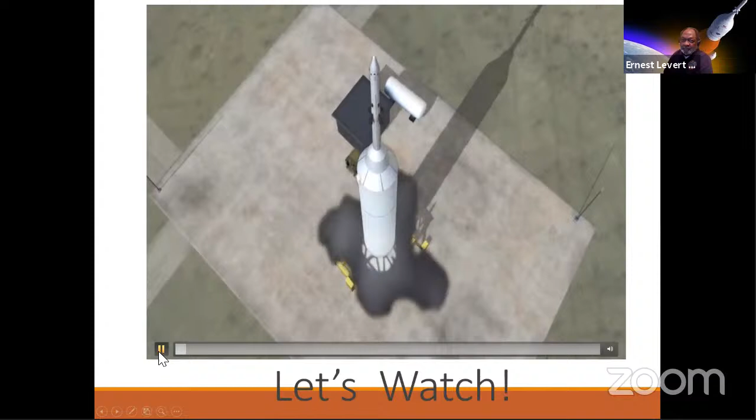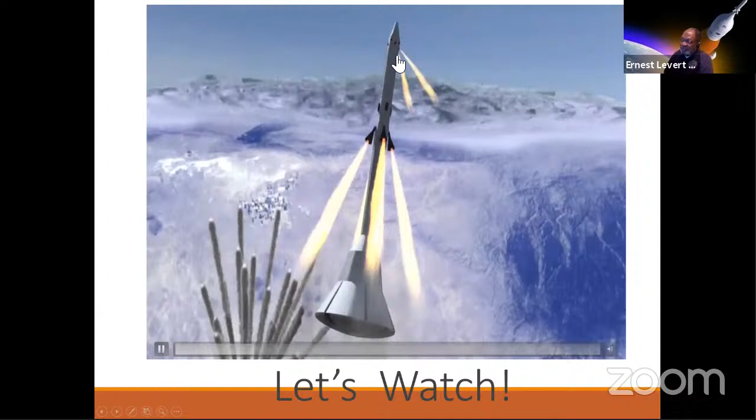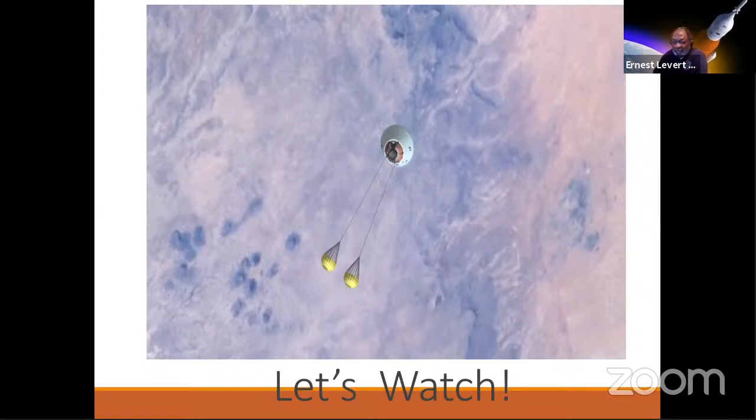So the part that I work on has already been used and ejected, but now you look at the astronauts coming back down to the Earth. This is what you want them to understand and see. So we'll watch this for a minute.

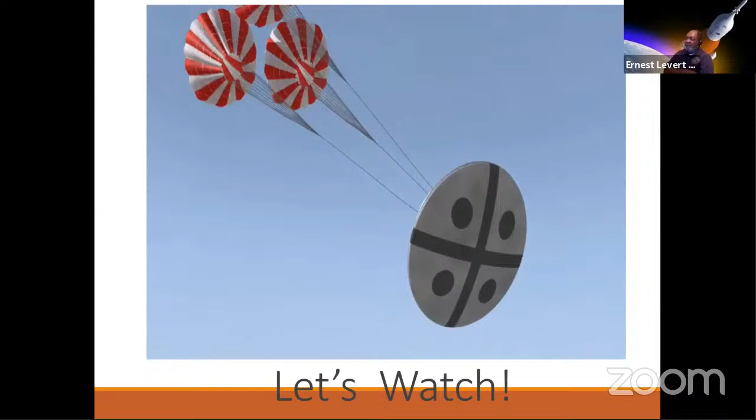The thing about you as engineers and material science, it can be the heat shield, it could be the launch abort system. We have so many scientists around the world working on the International Space Station and of course the Orion project.

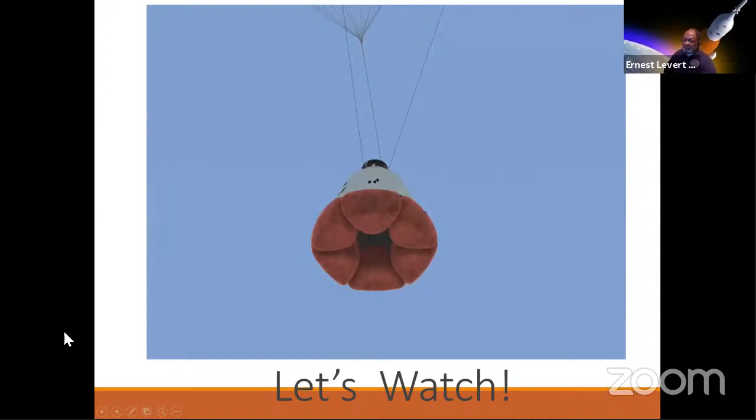And once again, how you're going to land on land is you have to have a landing system. And as we get ready to have a successful land back on Earth, everyone is successful and safe.

So with that being said, you have the launch abort system itself, which is what we're going to talk about this afternoon. And then we have the crew module, the service module. Once again, once this is used, you hope you never use it, but we're going to talk a bit more about how we make it happen.

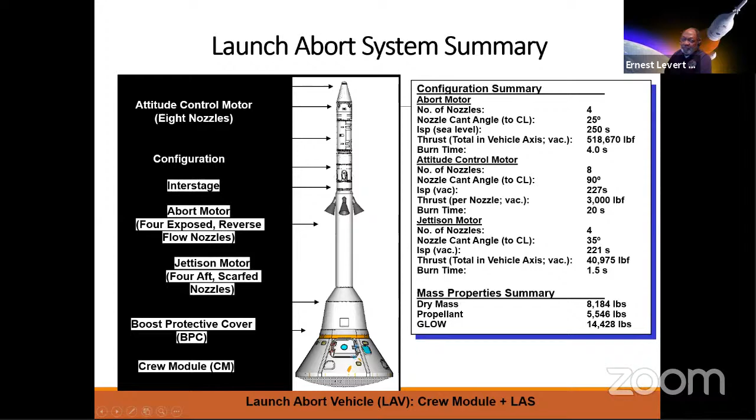These nozzles are a major concern. This is what provides the thrust from the rocket motor that takes place. Once again, these dimensions are in inches, sorry about that to my international colleagues, but this is about 555 inches in length and about 3 feet in diameter. So this is a very, very large system here.

So let's peel back the onion here and look at the launch tube itself, the motor. So you have a solid rocket motor here, but then you've got these four nozzles right here. So what we want to talk about this morning is these nozzles. These nozzles are made of a certain material.

So once again, we're engineers, so we're talking about the material components of this nozzle right here, the launch abort nozzle. So once again, this is a unique material: 4340 alloy steel, and there's an electron beam weld.

This was welded on afterwards, but there is a weld joint here and one sitting right here. So this is an EB weld, and one right here. The next slide will show a bit more detail.

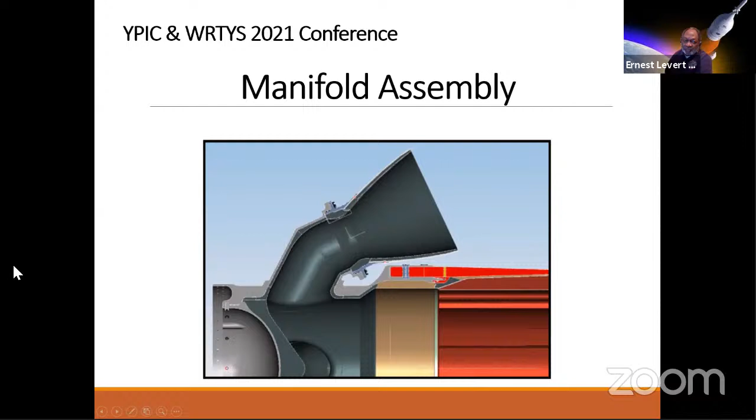And so why was this an issue? The problem we have with this material is, one, you had an EB joint that's 2 inches thick. And more importantly, it's 2 inches thick, 4340 steel. And once again, it was elliptical, so you had major issues with the thickness varying throughout the thickness range.

But EB was selected because of the restricted area. The problem that we had was it ranged from a half inch to a one inch range, to 1.7 inches, to 2 inches on the OD. And another problem, you had a very small clearance of a quarter of an inch to go.

Let me show you back here again, trying to get this beam through this quarter inch material right here. And the problem you had, everyone, was magnetism. This is 4340, it was very high in magnetism, and so you had a major issue with magnetism.

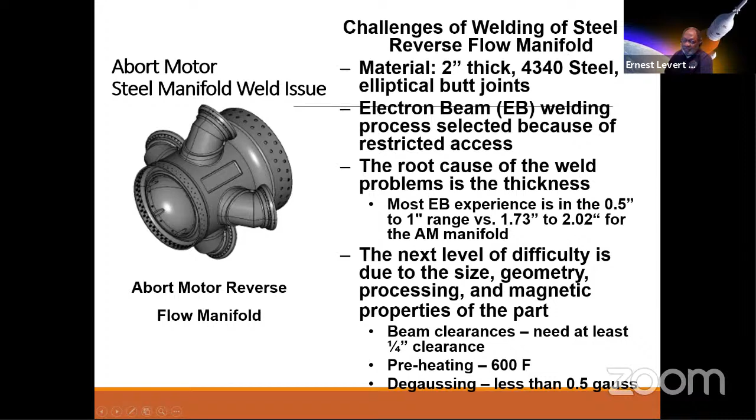And like I said, if you guys were with me in Budapest, I talked about the heat rejection system, but now we're going to focus on electron beam welding of this process.

So electron beam welding is a very small beam of electrons inside a vacuum chamber, welding at 60 miles an hour. But the process is very key to what we're using right now. I enjoy electron beam welding because, once again, of the small heat affected zone, and the most important thing is these electrons can be deflected by magnetism. So with that being said, we had some major problems with the steel.

You see the elliptical on the 45-degree angle. We had one weld here inside, then this other weld had to come in. So we start welding this component.

You can see in this picture the clearance is a quarter inch, trying to get this weld joint in here. Once again, the magnetism is very high in the part. So we ended up taking some material called MU material, putting it in here, and had the beam go in between that material to make the weld joint.

That was really critical and it was causing a lot of problems. Having to do the preheat of the part, the magnetism, the elliptical shape, were major issues. So as a weld engineer, I'm deciding how we want to make this happen, how we're going to fix the problem.

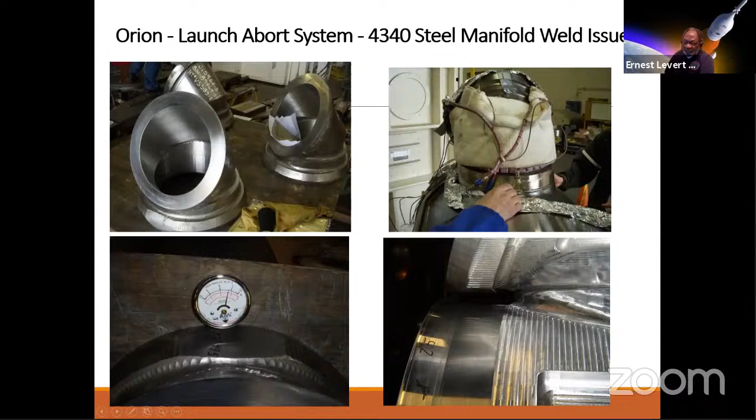So here I am standing inside the EB chamber. This is the nodule before they put the manifolds on. Using the steel, once again we had this MU material, and we were using this to make sure we could control any beam deflection.

So you think about yourself in a production environment, how you can produce this component with all of this contraption here, with the preheat, inside the vacuum chamber. You've got to maintain that — the magnetism was causing problems.

And you look at the weld joint, you had the penetration, but this is not what you want with electron beam welding, okay? So you had issues there — a lot of pores, a lot of outgassing. This was not what I felt was the ideal situation for this process.

We had all these cables here on the floor. We use this to degauss the steel, to get the magnetism out of the part.

When I got called in, I saw all of this information and gathered it up, and the NASA director asked, okay Mr. Levert, you've been here for one hour, what should we do? Well, I shared with him, based on everything I see here, this is probably a material I would not have selected because, once again, it's 4340.

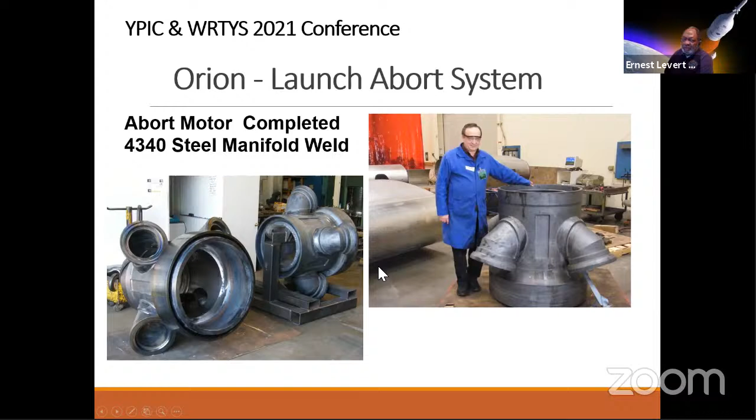But think about this — you're sitting on top of the capsule itself. They asked, what would you recommend? So I went back and did my analysis, looked at the yield we needed, the KSI properties in the weld joint, on the back side of where the thrust is, on the loads on the EB weld.

So I looked at that and decided: gentlemen, based on all of my analysis, I think we should change and go to titanium. And they said, why? When I shared with them all the reasons for using titanium — one, the weight reduction that it would take, going from 4340 to titanium, would be very critical.

It was a 10-to-1 ratio in saving weight, because it costs $500 to put one pound into space. So once again, the cost savings, and it's going to reduce the payload on top of the capsule, and the G-force is going up.

Second, you don't have to worry about any magnetism. So once you clean the parts, clean the parts again, and machine the part ready for EB welding, you wouldn't have any issues with the magnetism anymore.

And the loads were a lot better — mechanical properties were better than the 4340. So it took a year to change that.

So once again, we had a meeting together, found a company out of Indianapolis, with NASA Johnson, NASA Marshall in Huntsville. So the team, ATK, had the entire cost. We all got together in a room, and I recommended we go to titanium.

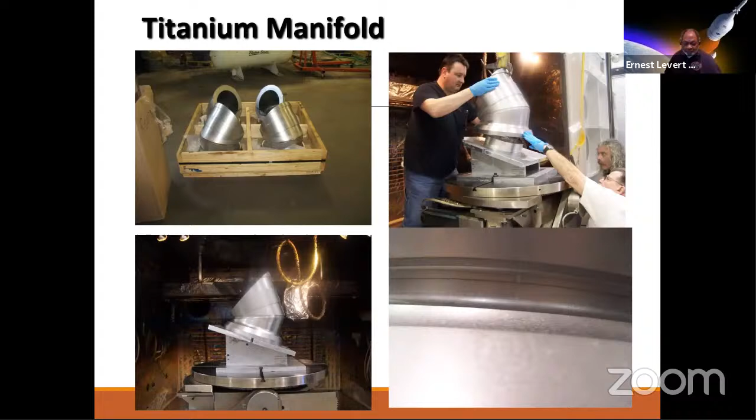And so once again, they asked the question: were we successful? I said yes, we were very successful, because one, we had a great part — it was once again a titanium manifold. The guys did a great job welding it up with the tooling and fixturing, and it just worked out tremendously.

So once again, we were successful welding the titanium. There was no magnetism, no preheat, no post heat, no interpass temperature, and once again the 10-to-1 weight savings. So once again, everyone's very happy with the EB welding of the launch abort system. And I was very happy with that because at the end of the day, I just enjoyed that part. So every day I look at the launch abort system, that is my project up there.

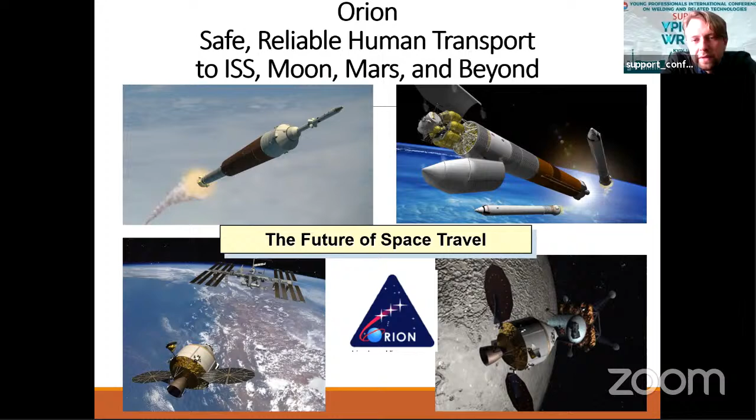My question is also about EB welding of titanium details. It's a great idea, I think. And it's an easy question about defects. You talked about defects after welding in the steels, and in the case of welded titanium details, it will be with pure and clean methods. Are there any defects after welding in the weld or seam?

No, the key was when we cleaned the parts, we manually scraped the parts, and we welded the parts within 4 hours after doing the alkaline clean. Once the parts were clean, we had 4 hours to get them inside the chamber and get them welded, and there were really no defects. We were like 98% pure. We had a little porosity, but all acceptable to a Class A weld for aerospace D17.1.

Our vendor did a great job with the cleaning. I was very impressed, and my EB technician did a great job. We made sure we had a moving gun, and we were very successful with the cleaning process. So there were no defects and no arcing or anything. So it made me very happy, made me a hero for the corporation. Every time I see my backdrop here, this is my launch abort system. So as I retire from Lockheed Martin, I have a legacy that I left behind me.

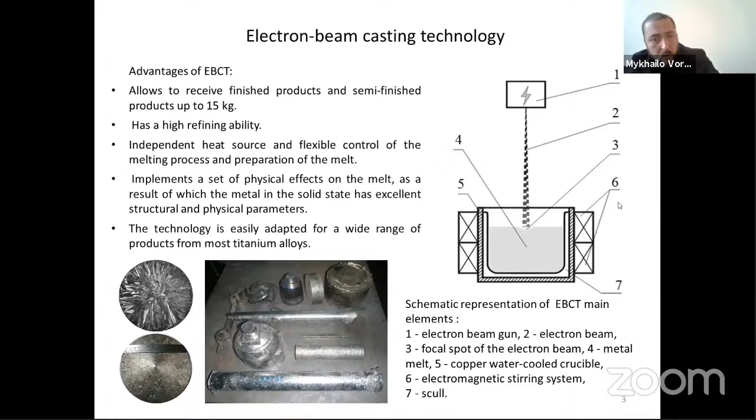As you can see on this slide, the structure of our cast parts is better than in some familiar technologies. The second step was to choose the ceramic materials for producing shells, the molds for investment castings. It was the only reliable method to obtain something very difficult and thin-walled.

Due to technological requirements, Gibbs energy, and price of materials, 3 types of ceramics were chosen. A very important thing is that our method provides the ability of using a cold mold, while other methods require using hot molds, heated to about 600 and more degrees Celsius. Different contact shells were produced to investigate the features of ceramic-melt interaction.

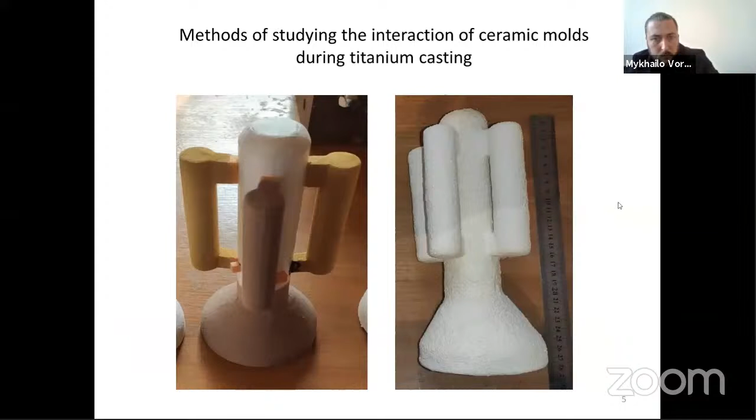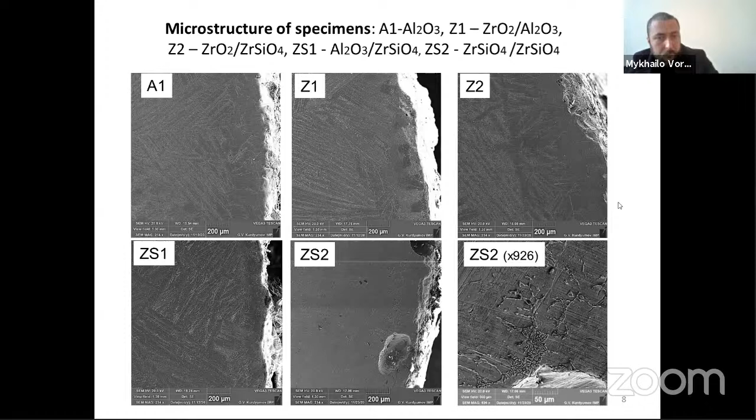Here's the same specimens, but in larger увеличение, I forgot the word, the larger view. Yes, thank you.

The next step was to produce a real implant. First step was to create a model. We chose PLA plastic because of its mechanical properties and ability to be printed as a small detail. Then the PLA part was added to a polystyrene gating system and formed into ceramic mixture. After drying and sintering at 1100 degrees Celsius, the mold was ready to be poured with titanium.

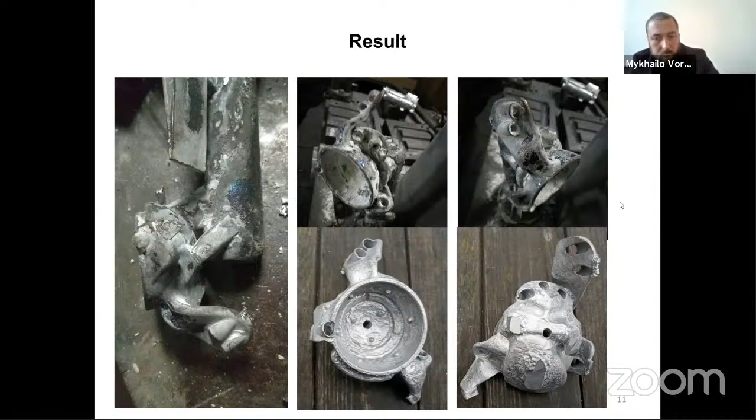If you're interested, we invite you to join us in this work. Thank you.

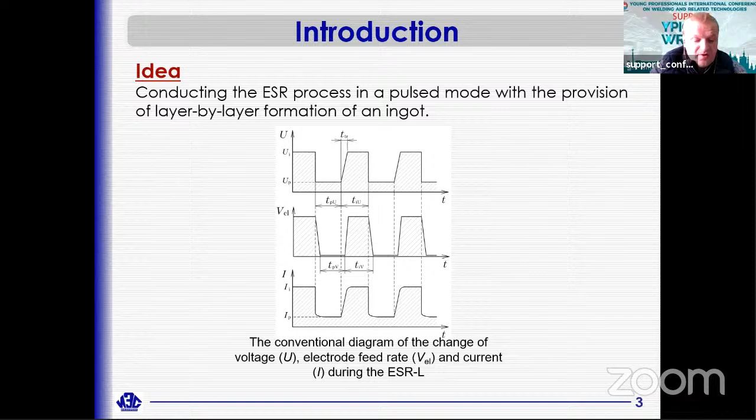One of the possible ways to solve such disadvantages is to conduct the ESR process in a pulsed mode with periodic layer by layer formation of an ingot. The slide shows a diagram of the main parameters of ESR with periodic layer by layer formation of an ingot. The aim of this work was to study the features of the ESR process with layer by layer formation of an ingot and to study the patterns of structure formation of the smelted metal.

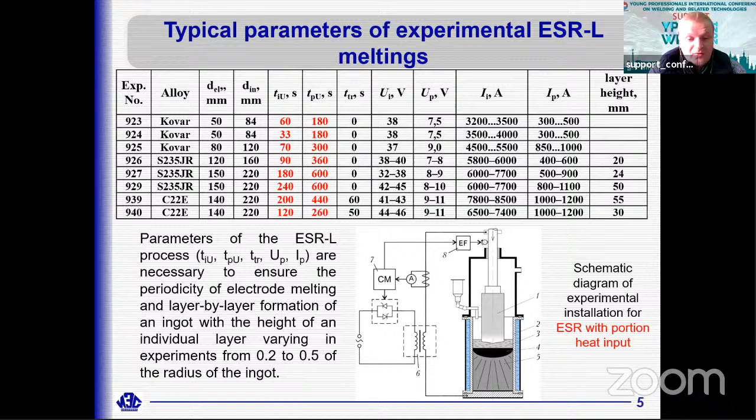This slide shows typical parameters of experimental ESR melting and a schematic diagram of the experimental installation for ESR with portion heat input. Parameters of the ESR process are necessary to ensure the periodicity of electrode melting and layer by layer formation of an ingot, with the height of an individual layer varying in the experiment from 0.2 to 0.5 of the radius of the ingot.

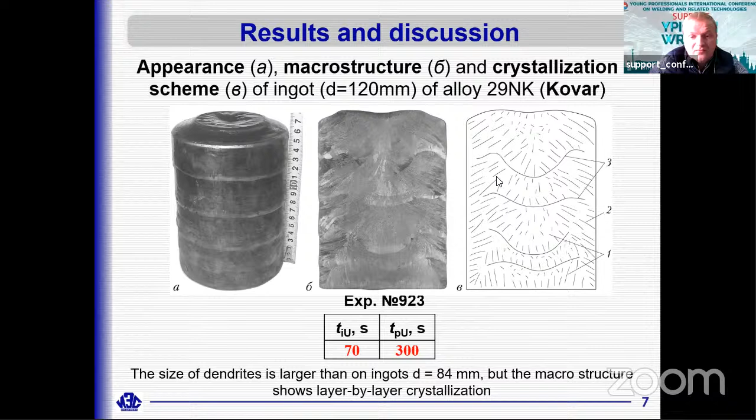We also obtained Kovar ingots of 120 millimeters diameter. The size of dendrites is larger than in the 84 millimeter ingot, but the macrostructure shows layer by layer crystallization. In addition, experiments were performed on ingots of 220 millimeters diameter of this steel. The use of ESR affects crystallization, but we found defects in the macrostructure of ingots.

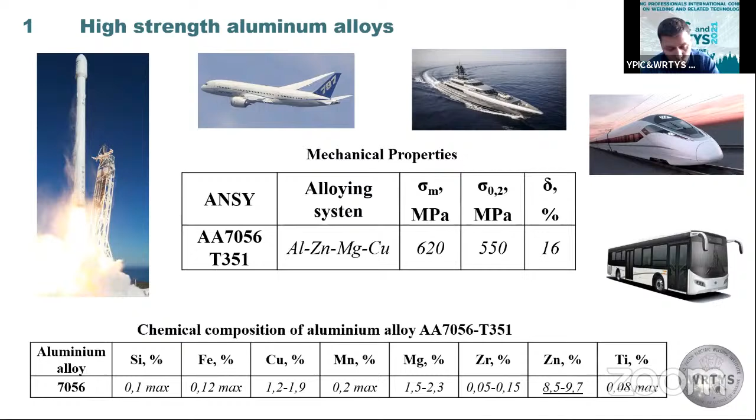In this study, we take a look at the aluminum alloy 7056. The main feature of this alloy is high zinc content, near 10%, which makes it a very hard to weld alloy. We tried to make traditional welding; we tried to weld it in two passes using MIG pulse welding in inert gas with 50% argon and 50% helium. It was welded in our institute. The microstructure was partly good, but there was very high softening in the middle of the area.

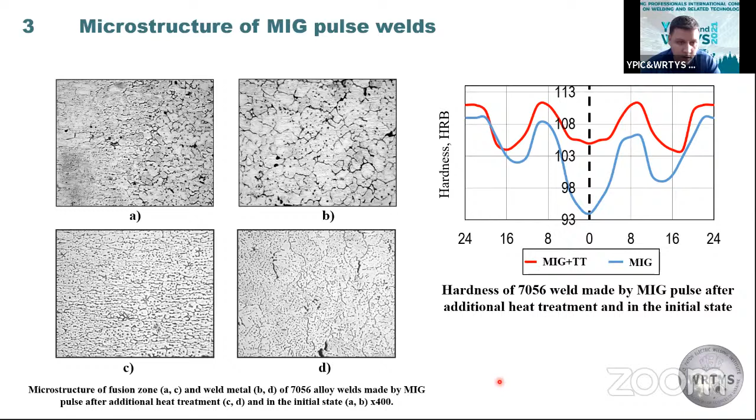Better microstructure, as you can see, this was before as welded joints, and this is after heat treatment. One of the perspective ways to obtain sound joints with less heat treatment is welding in the solid state, such as flash butt welding technology. Using flash butt welding technology gives us good microstructure, but we have some issues with the heat treatment of this alloy. It was T351 treatment, which was not only annealing but also the deformed state. So before welding, it was heat treated, and after that we obtained sound welded joints.

Here we can see a microstructure of as welded and heat treated joints. As welded joints also have some issues in the middle of the joints. We have lower points in the hardness, but after the heat treatment, it gets much better, and we obtain a microstructure more suitable for fatigue behavior.

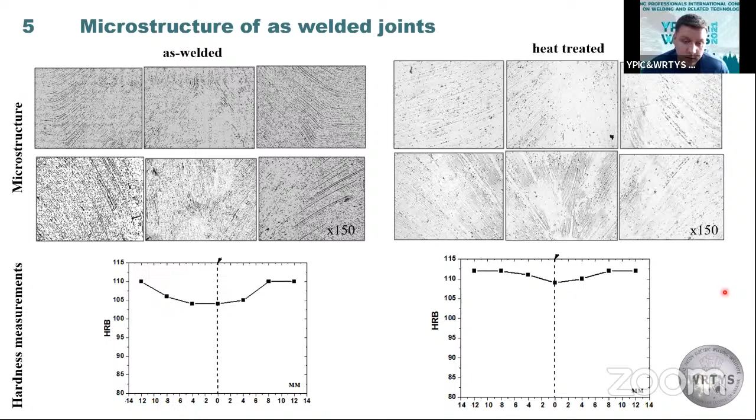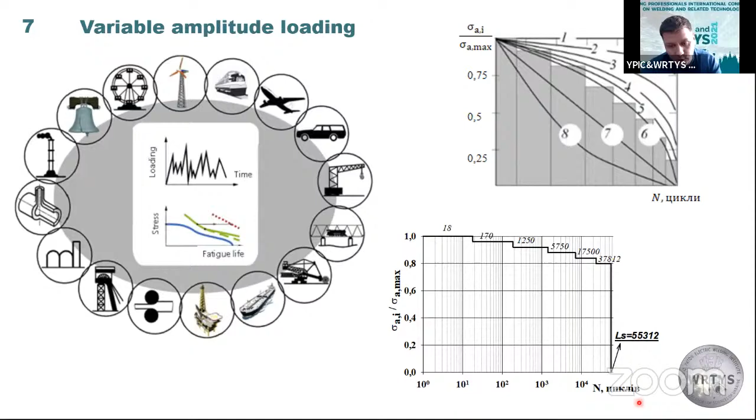Structures have less durability and so shorter life. So we use for the variable amplitude loading a standard Gaussian distribution and provide fatigue testing on this point. You can see here the program amplitude loading that was used to shorten the fatigue experiment time. So here you can see the main data of the provided testing.

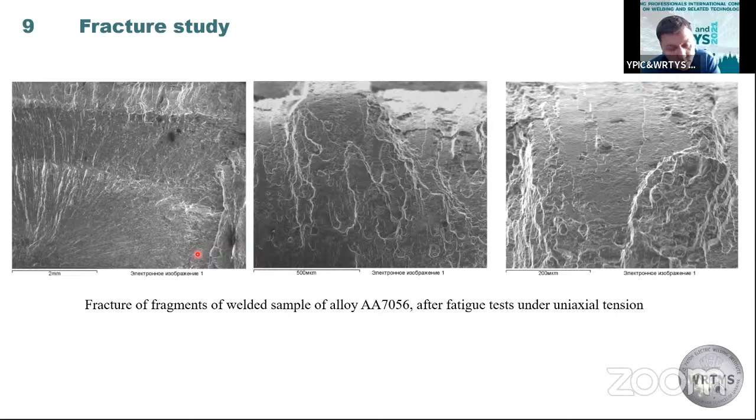Tensile strength of welded joints is near 90% of parent metal, and fatigue behavior under stress ratio 0.1 and variable amplitude loading shows an endurance limit near 60% at 2 million cycles. This confirms the perspective of using flash butt welding for obtaining joints of high strength aluminum alloys with high zinc content.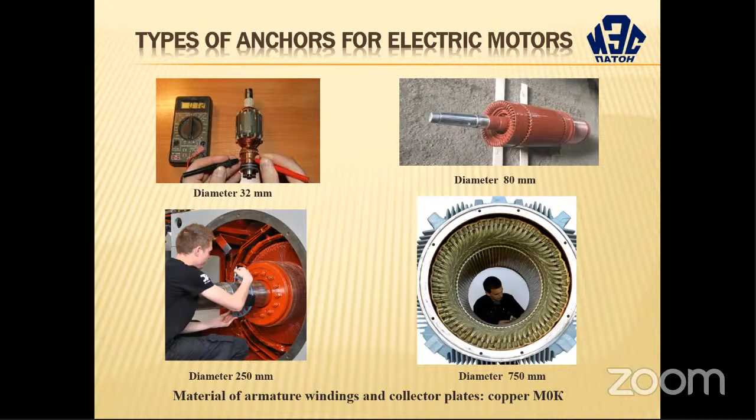An important technical problem is connecting the armature winding with the collector plates, which are made of copper. As for today, the connection of armature winding with collector plates in the manufacture of electric motors uses soldering, butt welding, and argon arc welding.

This uses automatic settings which are designed for large volumes of production. However, due to the wide range of types of electric motors and the nature of the connection of the windings to the collector plates, their use is not always appropriate.

In this work, a complex of works on development of technology of TIG welding in the environment of argon of copper tires with collector plates of a connector, as a starter generator DKS 18-8, is executed.

The conditions of the assembly of the starter generator are defined, which allow obtaining a high quality weld. The connection in the automatic mode, namely, the gap in the welded joint must be less than

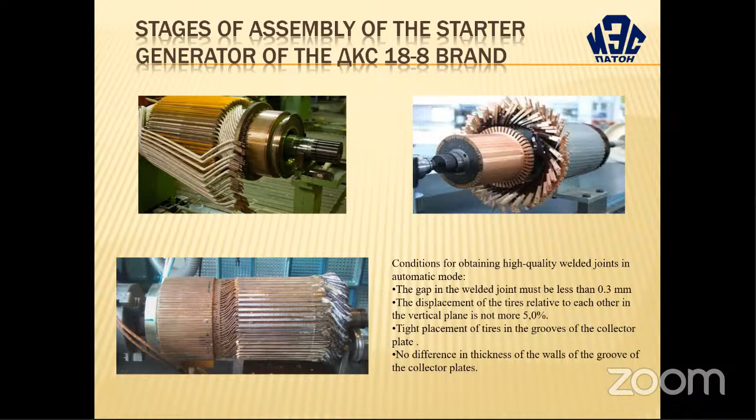Welding in the prototype starter generator was performed using the installation layout shown in the picture. The armature was fixed in a rotator on roller supports in a horizontal position. The burner was mounted locally above the welding area in a device that allowed it to move along the connector lamella in the range of ±5 millimeters.

The picture shows the appearance of the full-scale sample after welding. The connector section before welding and after welding are shown in the picture.

The main condition for high-quality welding of base bars with connector plates is the absence of lamellar jumpers possible when melting metal. In this case, due to the optimal modes, they are absent. Similarly, due to the high thermal conductivity of copper, the short duration of the welding process, and low welding current, there was no burnout of the lamellar plates.

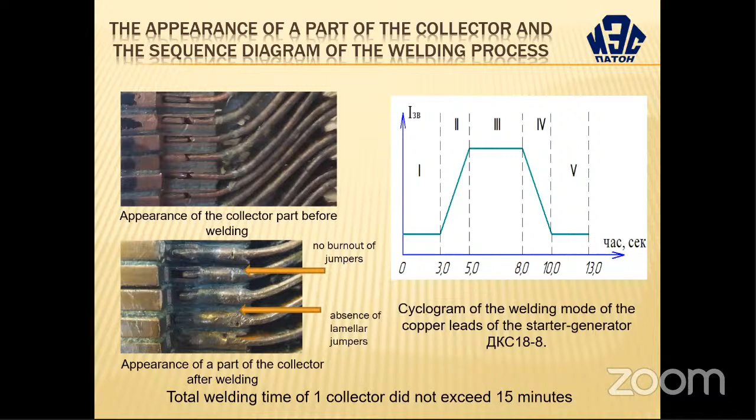Conclusion: in this work, a set of works on TIG welding in the environment of argon of copper tires with connector plates of the collector of the starter generator DKS 18-8 is performed. The conditions for the assembly of the starter generator DKS 18-8 which allow obtaining high quality welded joints in automatic mode are defined. As a result of the conducted experimental works, the cyclogram of the process of welding is constructed. Technology parameters of welding are defined.

The developed technology is quite rational in the manufacture of a small number of starter generators, such as DKS 18-8, as it does not require specialized expensive installation. Thank you for attention.

Thank you for your interesting presentation, Taras. Does everyone have some questions? So there are no questions. Maybe I will ask some.

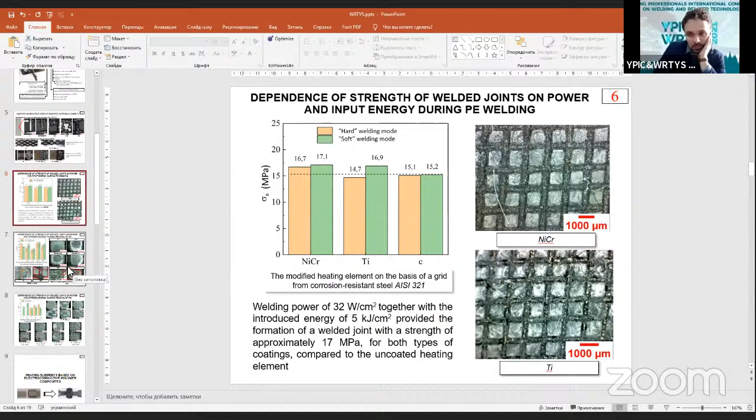Further, we used these heating elements to weld high-tech polyetherimide, which is widely used in the aircraft industry, and the best results were obtained using nichromium coating, with an increase in strength at the level of 10 to 13% in the soft welding mode, characterized by high welding time and low welding power. As you can see from the fracture surface of the welds, in the case of nichromium coating, fracture was conducted by the heating element.

Decrease in strength was caused by such defects as holes and others. Also, we used a metal mesh made of titanium. As you can see from the diagram, it also showed an increase in strength to 15% in comparison with standard, unmodified metal mesh.

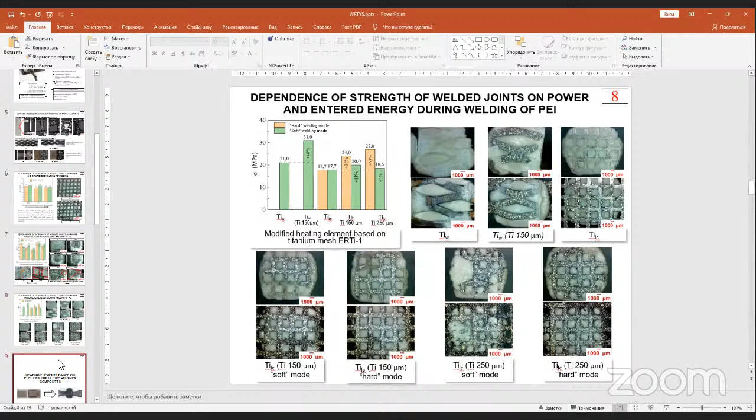But an increase in strength to 13% does not satisfy our demands. So we moved to heating elements based on electroconductive polymer composites made of polyethylene, filled with electroconductive carbon black and carbon fiber.

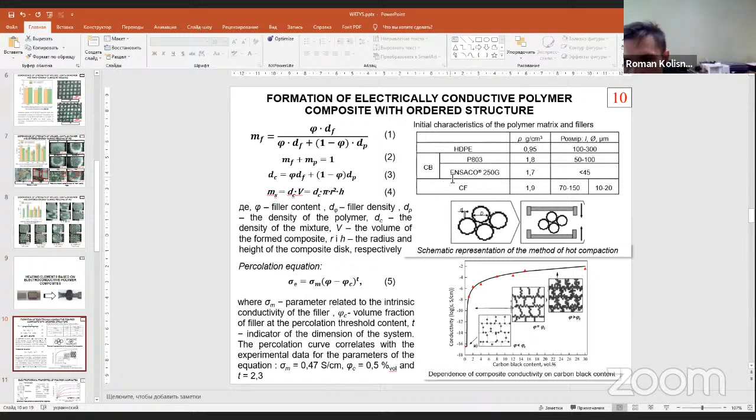In the case of composites filled with carbon fiber, and combined filler of carbon fiber and carbon black, we see a decrease in temperature after applying a certain critical voltage, connected with a positive temperature coefficient caused by thermal expansion of the polymer matrix.

So further, we used composites filled with carbon black, increasing filler content to 12 and 16 volume percent. In this case, the composite generates heat, but it is unevenly distributed along the surface of the heating element, and the weld joins only in the area where temperature was higher than the melting point of polyethylene, which is 130 degrees.

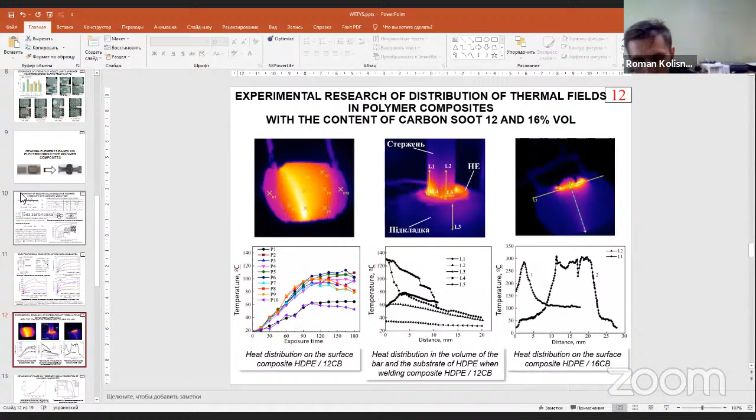So further, we increased the filler content to 30 volume percent, and in this case, after applying a value of 5 volts, the composite heats to a temperature of 200 degrees Celsius, much more than the melting temperature of polyethylene. In this case, the thermal conductivity of the composite also increases, which has a positive effect on our heating elements.

After that, we used these elements to weld lap joints and butt joints, effectively using them. As you can see from the pictures, the temperature generated by this heating element is sufficient to form a weld.

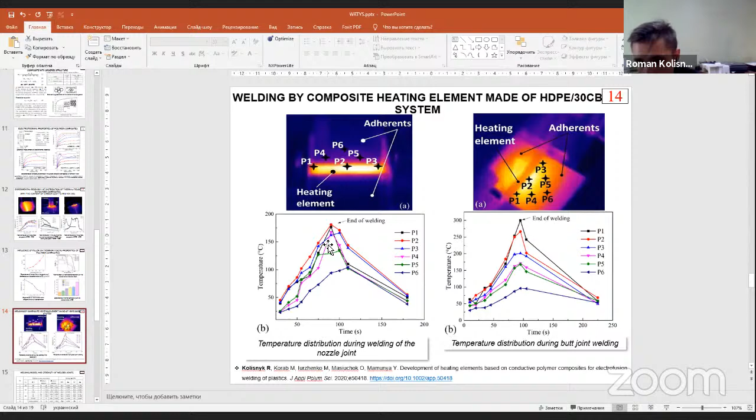The welding modes were the same as for modified heating elements: hard mode, characterized by high voltage and low welding time, and soft mode, with long welding time and stepwise increase in voltage. The best results were obtained using the soft mode.

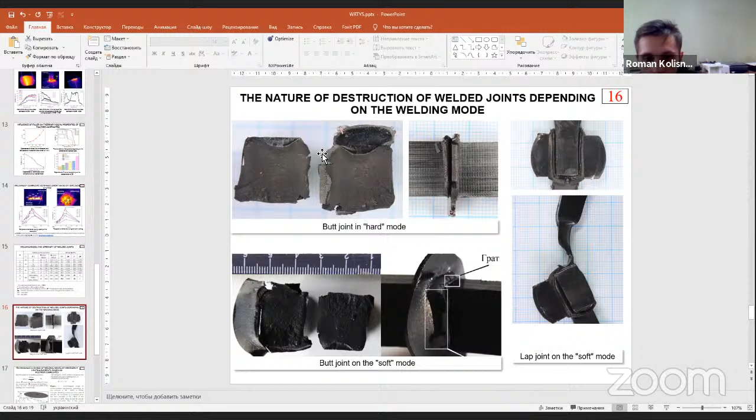Depending on the welding mode, we also observed different fracture results. In the case of hard welding mode, as you can see, melting of the surface in the heat-affected zone is poor, and the fracture is brittle.

In the case of soft mode, as you can see, polyethylene melts better, and the fracture is more plastic. Overlap joints fracture through the basic material, which tells us this heating element is effective for joining plastic.

According to these results, we built a diagram which has 4 zones. In zones 1 and 2, we can form a welding joint, and in zones 3 and 4, there is no welding joint obtained because of lack of power or excessive power.

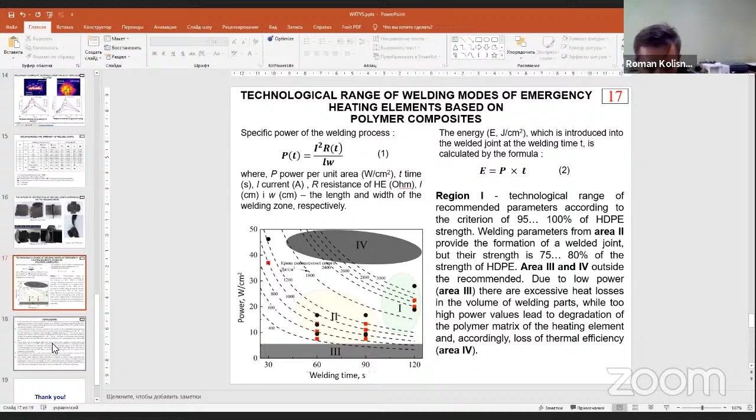So we can conclude that by modifying metal heating elements, we can obtain an increase in strength, and we found regimes that can form a welding joint with increased strength.

It was found that in composites filled with carbon fiber and a mixture of carbon black and carbon fiber, there is a positive temperature coefficient, consisting of increasing electrical resistance of the conductive phase of the filler due to thermal expansion of the composite. Further, we used composite filled with carbon black.

Also, it was established that modes with increased welding time and stepwise increase of specific power of the welding process ensure the formation of a strong weld. According to these results, we built a diagram which serves as a criteria for formation of a welding joint.

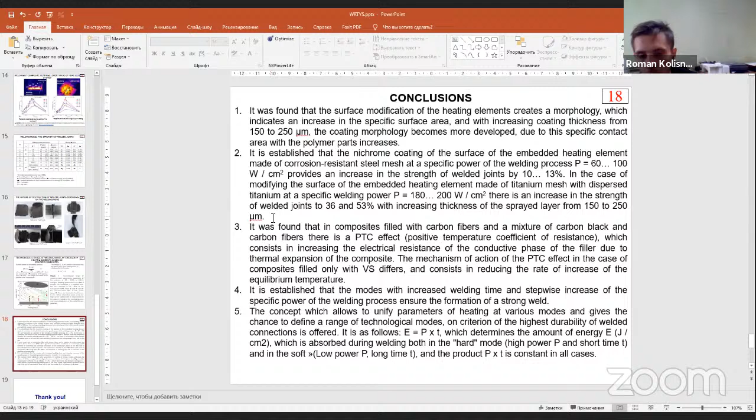Okay, I have a little question. Thank you for your amazing presentation. This topic is very relevant these days. I have a little question, just interesting for me, because I'm a specialist in welding of metals and also plastics. But it's interesting for me—can you show the slide, like slide 14?

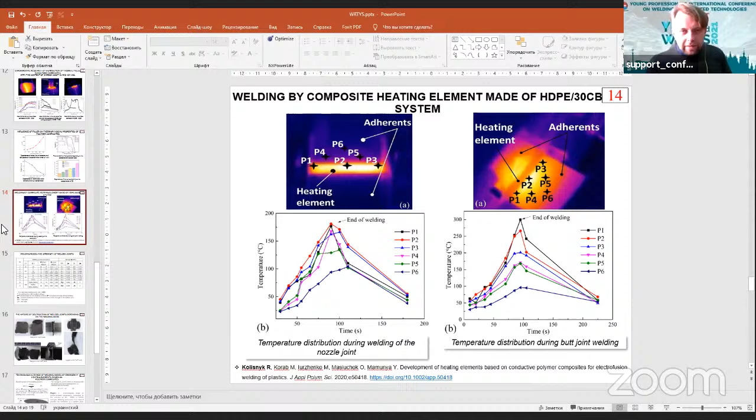The temperature was measured by a special thermal imager, after which in the program we measure the temperature of the surface of the composite. Okay, I understand. Thank you. Thanks for your pictures. Thank you.

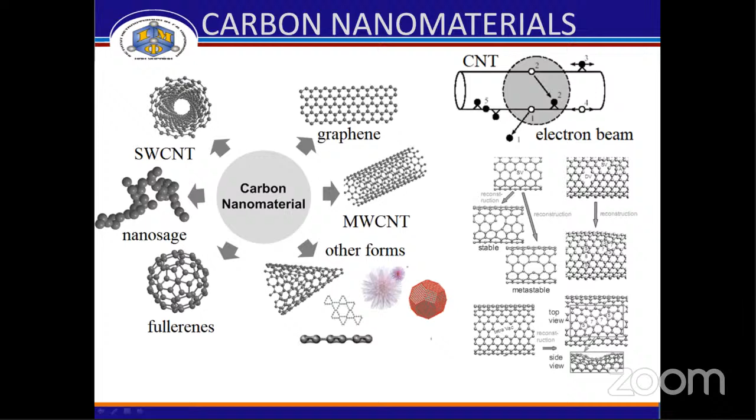So we need to study radiation defects due to the possibility of using nanotubes in space and nuclear reactors, as well as to use high energy radiation as a technological tool to create radiation defects and obtain material with fundamentally new properties. So we study various types of carbon nanotubes after electron and gamma radiation. These are examples of photos with different catalysts.

Carbon nanotubes in a bulk state are not electrically conductive, and for transition to the electrically conductive state, it is necessary to establish an electrical contact both between neighboring nanotubes and with electrodes. Therefore, CNT were placed in the dielectric cylinder under a piston. With a decrease in volume, the circuit between the electrodes closed and the system passed into the electrically conducting state, which corresponds to the dielectric-metal transition and is accompanied by a sharp increase in electric conductivity as a result of reorientation of CNT and their compression.

Then it reaches a maximum and with subsequent compression smoothly decreases. In the situation with single-wall carbon nanotubes, electrical conductivity is 50 times lower than multi-wall ones. This difference is due to the different types of conductivity in CNTs. At low densities, the volt-ampere characteristic of the multi-wall carbon nanotubes has a non-linear symmetric form, which indicates van der Waals interaction and tunnel transitions. And at high densities, it is a linear dependence, so metallic conductivity, and the single-wall nanotubes have an asymmetric volt-ampere characteristic for all compression densities, which indicates the semiconductive nature of the conductivity. It's shown in these colors.

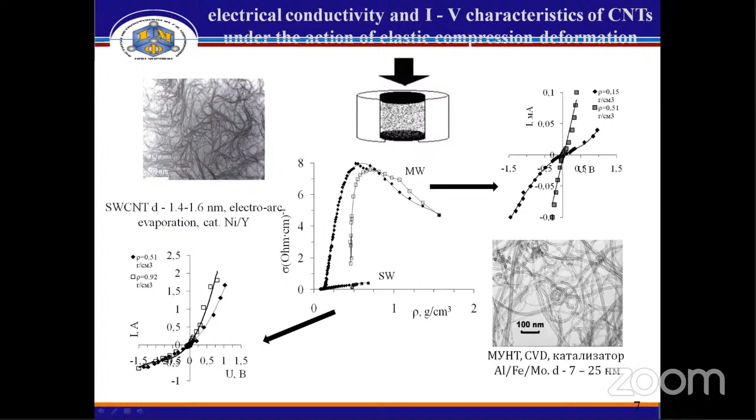Penetrating radiation causes not only radiation damage to materials, but also serves as an effective technological tool for improving the quality and obtaining materials with fundamentally new properties. Multi-layer carbon nanotubes with 18 nanometers in diameter were irradiated with gamma quanta with a dose up to 3.3 × 10^17 gamma quanta per centimeter squared. After exposure to radiation, the characteristic electric conductivity curve changes. Its growth is less gradual due to the change in the structure of CNT and the appearance of defects at the stage of unloading, and a notable change in the shape of the electrical conductivity curves is obtained in comparison with the situation before irradiation.

For unirradiated CNT, the elastic limit is 18%. After gamma quantum radiation, a minimum is observed on the dependence of the elastic limit on the radiation dose. This indicates the formation of defects at low doses of gamma radiation. Defects practically do not lead to a decrease in the elastic limit; after annealing it slightly increases, but their interaction with radiation causes a decrease in elasticity and critical density by almost 4 times as a result of an increase in the curvature of their shape due to the formation of topological defects.

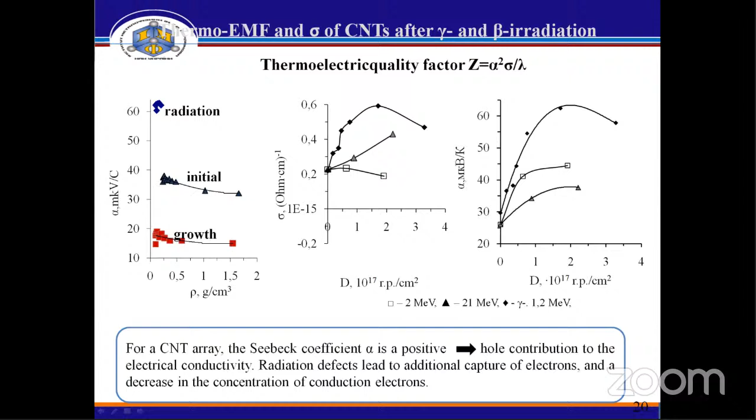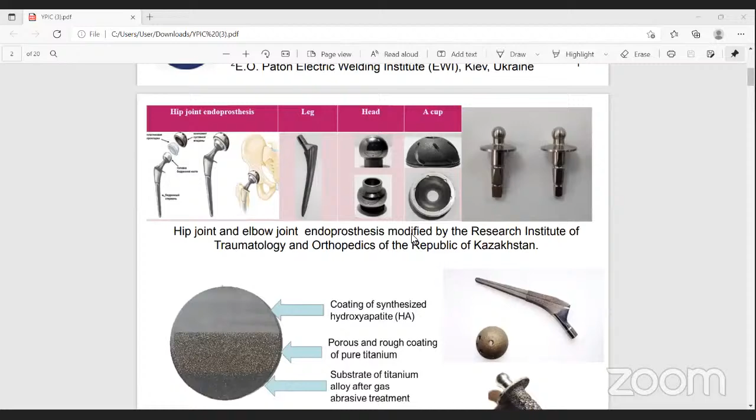Currently, thermal spraying methods are widely used in applications related to the metalworking industry, but for the biomedical field, it is an innovative issue with a potential that is currently being studied. One of the factors that prevent the introduction of thermal plasma spraying technologies in the production of biocompatible coatings is a possible heating of the implant during the process of coating deposition with a jet of high temperature plasma, which can lead to changes in its shape and mechanical properties. The use of microplasma spraying technology allows avoiding volumetric heating of the implant due to the low power of the process, up to 2 kilowatts.

The formation of thermal plasma coating is characterized by the ingress of large numbers of particles more or less melted in the plasma jet, forming so-called splats, between which pores are formed. Herewith, the porosity and roughness of the coating surface depend on the size, speed, and degree of heating of the particles forming it. The pore size is affected by both the actual size of the coating particles and their shape. Understanding the mechanisms of coating formation allows selecting specific parameters of thermal plasma spraying to obtain the desired microstructure of the coating.

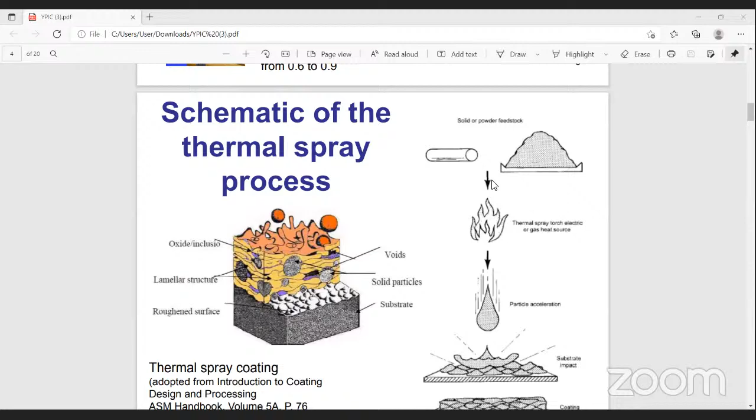The use of robotic microplasma spraying allows for precision coating deposition on complex shaped implant parts, such as parts of elbow and hip replacements. In our previous papers, it was shown that robotic microplasma spraying can produce coatings on medical implants made of biocompatible titanium and hydroxyapatite materials with a desired porosity and roughness, meeting the requirements of international standards for implants for surgery in terms of coating adhesive strength, crystallinity, and purity.

Due to its high strength and chemical stability, zirconium is promising as an orthopedic biomaterial. Zirconium has a high resistance to biological media, even higher than titanium, and excellent biocompatibility, due to which it is used for the creation of bone, joint, and dental prostheses, as well as surgical instruments. In dentistry, ceramics based on zirconium dioxide are material for the manufacture of dentures. In addition, due to its bioinertness, this material serves as an alternative to titanium in the manufacture of dental implants.

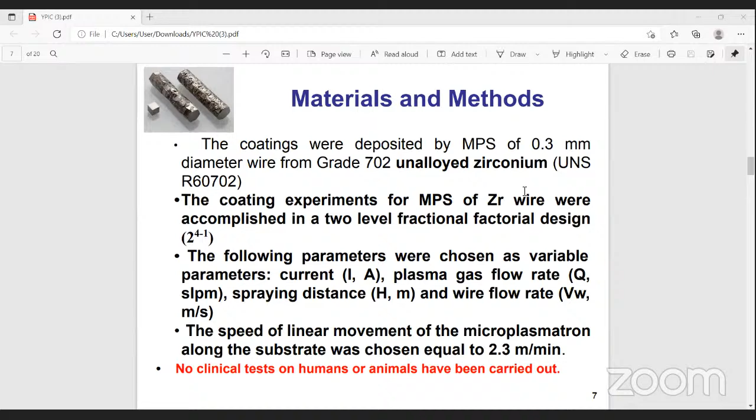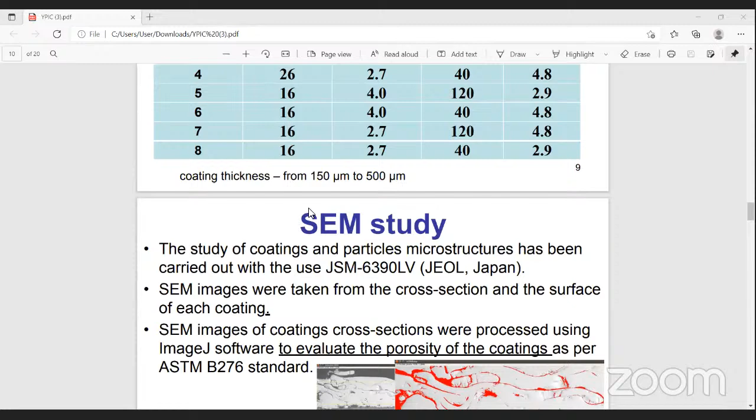The study of coatings and particles microstructures has been carried out using the instruments shown here, and by processing the obtained images, the coordinates of at least 20 points of the line forming the profile were determined. Using these coordinates, using MathCAD software, a metallization figure was constructed, and the Gaussian normal distribution function describing it was determined, by which the area of metallization figures was determined.

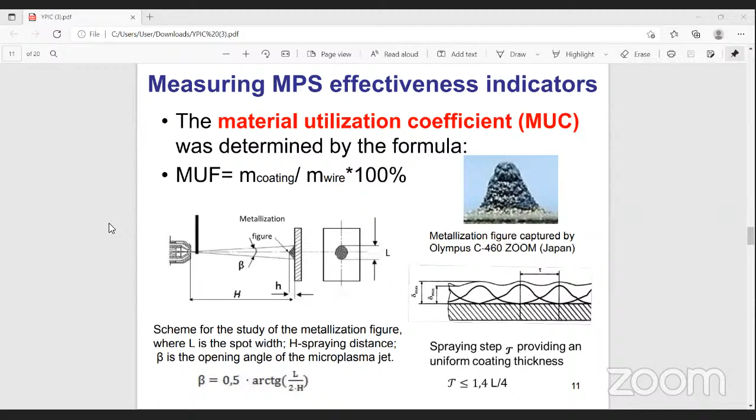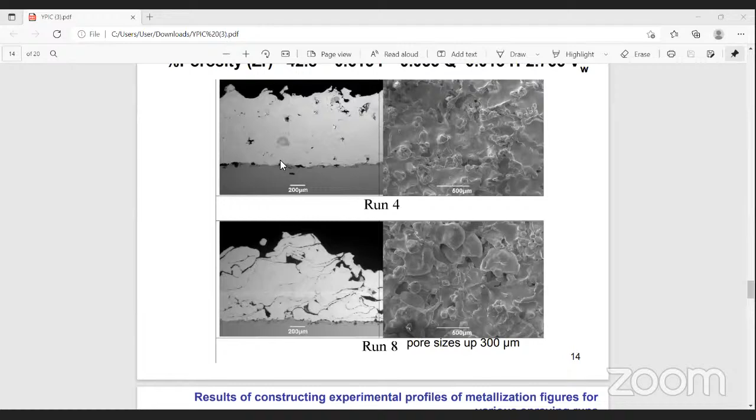Here you can see the dependence of porosity of the coatings on microplasma spraying parameters in different runs, and the cross-section images. Here are the results of constructing experimental profiles of metallization figures for various spraying runs.

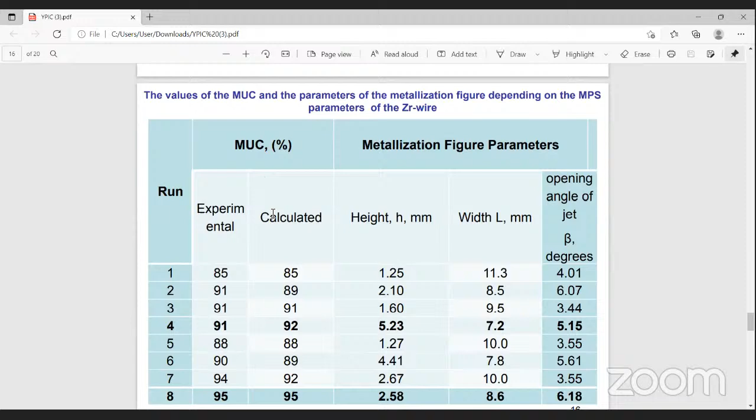Here are the values of material utilization coefficient or factor, and the parameters of metallization figure depending on different microplasma spraying parameters on the zirconium wire. The regression equation makes it possible to assess the influence of each microplasma spraying parameter on the material utilization coefficient. It is possible to correlate the temperature and the speed of particles before the collision with the substrate to the resultant structure of the coating.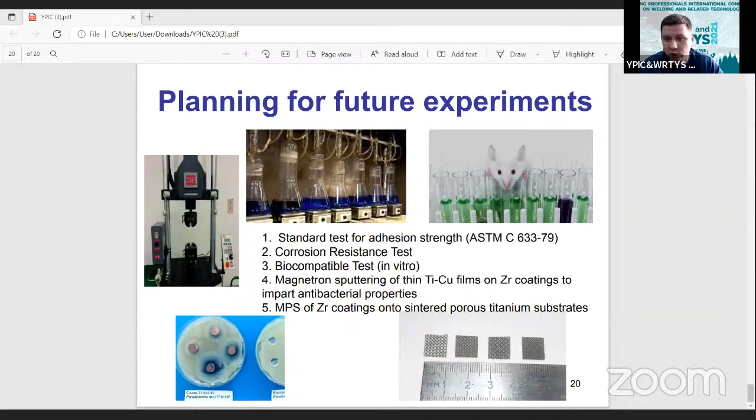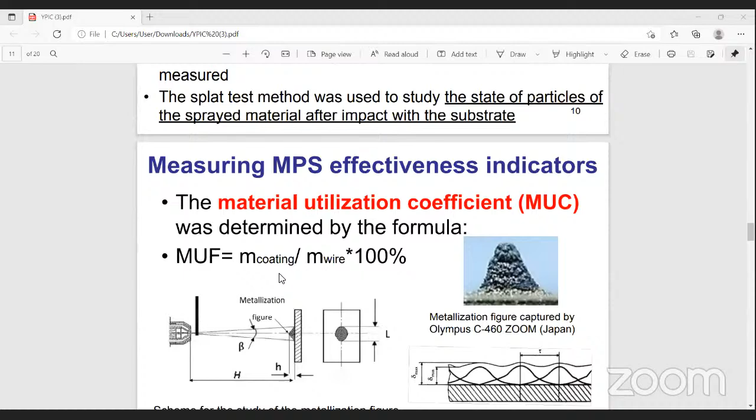Hello. I have a question about your process. On your slides, you show the process you make in the air by a Kawasaki robot, is that true? Yeah. But the base metal you used is titanium. It's true, of course. Yes. Okay. How about quality? Because titanium is a chemically active material. Are there any defects on this surface after spraying, because you do it in the open air, not in a chamber?

Yeah. So for now, we just estimated the porosity that was obtained by spraying. I think we will do that in the future analysis and experiments. Thank you.

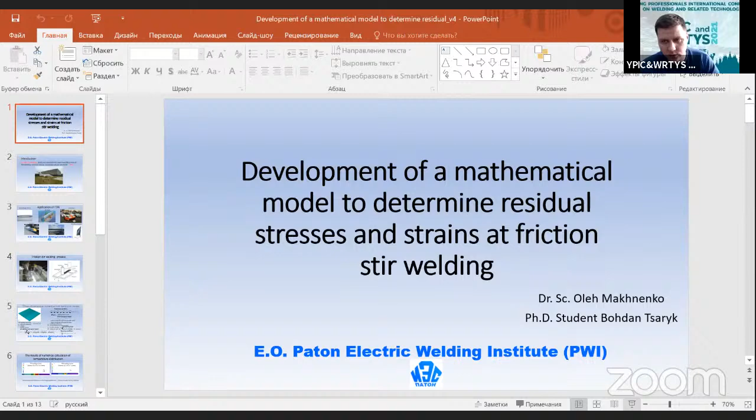Ladies and gentlemen, I want to present you a presentation about the development of a mathematical model to determine residual stresses and strains at friction stir welding. Friction stir welding was invented in 1991 in Cambridge, in the Welding Institute. Here is shown the building of the Welding Institute in Cambridge and the plane Eclipse 500. This plane used friction stir welding technology for connecting the skin instead of rivet connection.

FSW is widely used for the manufacture of high-tech products. Today, here is shown the largest ship, Superliner Ogasawara, the largest friction stir welded ship so far. Also, friction stir welding is used in aerospace, automotive, railways, bridges, and producing personal computers.

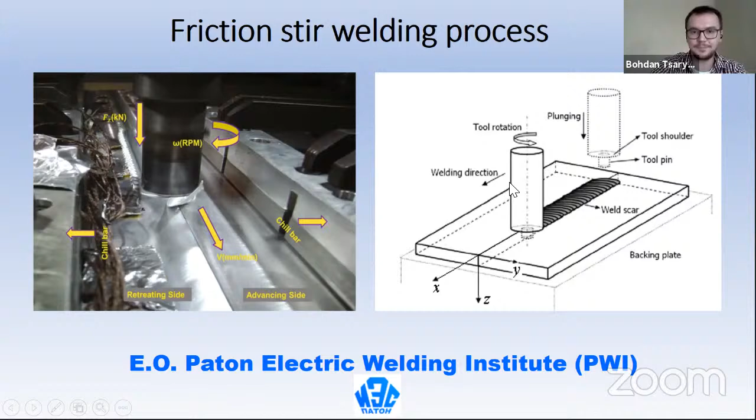During FSW, the friction stir welding process, the working tool is immersed in the metal of the welded joint, rotates and moves along the joint. Friction force generates heat, and that's why we have the joint. Here we have the numerical model for the friction stir welding of a butt weld. Here is represented the model of the temperature problem, heat. Here we have the heat source for FSW and for arc welding.

For friction stir welding, the heat source we use is equal to the coefficient of friction multiplied by the normal force at the contact point and the circular velocity, and then multiplied by our radius.

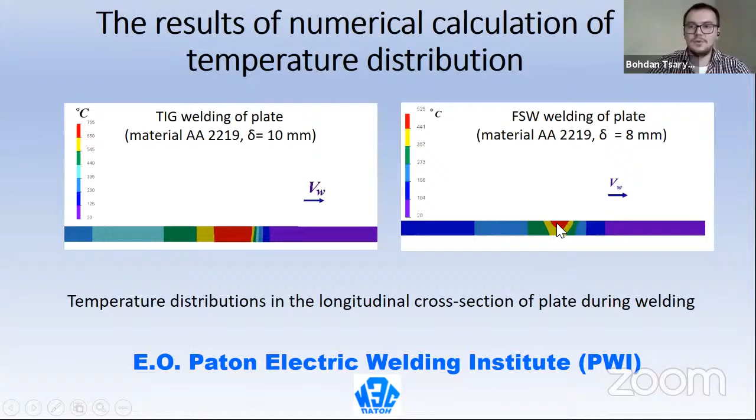After modeling, we have diagrams of temperature for aluminum alloy, for TIG welding and FSW welding. Here we can see that the temperature in TIG welding is much greater than that for FSW welding, and also the area of the weld with the highest temperature is much greater than for friction stir welding. Here are the results of numerical calculation of longitudinal plastic strain distributions.

The strains: the highest value of strains for TIG welding and for FSW welding is almost equal, but the area for TIG welding is much greater. But for the transverse plastic deformation, it is another situation. For FSW, friction stir welding, this deformation has a lower level, three times lower than for TIG welding.

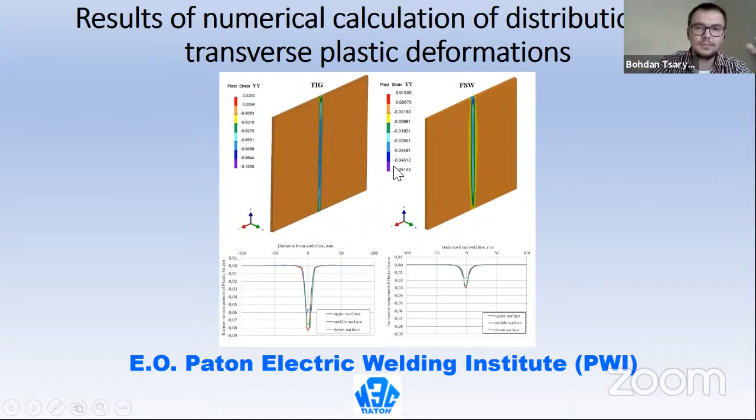But for transverse residual stresses, we have another situation. For transverse residual stresses for FSW, friction stir welding, they have a lower level, 3 times lower than for TIG welding.

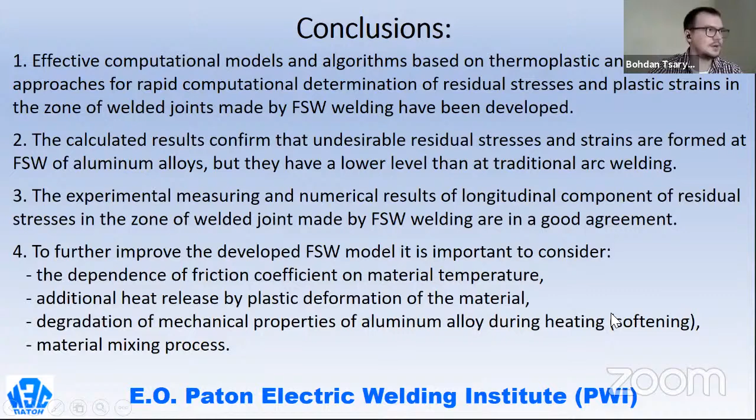Also, experimental and calculated data have a good agreement, and in the future I want to research the dependence of the friction coefficient on material temperature, and also additional heat release by plastic deformation of material, degradation of mechanical properties of aluminum alloy during heating, and also material mixing. Thank you for your attention.

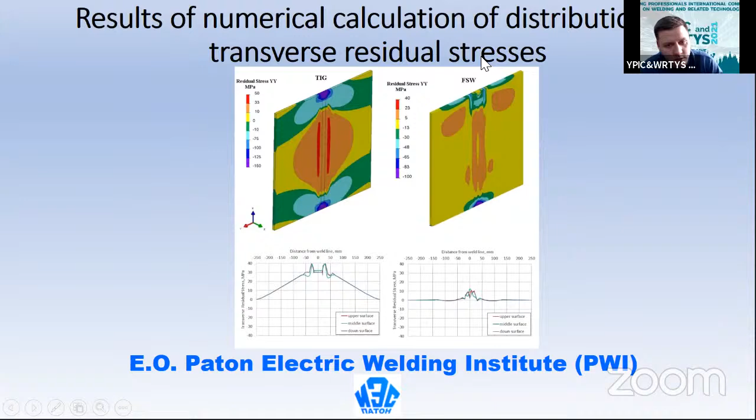It's dependent on the coordinate system, where this coordinate system is located. Our coordinate system is located in the middle of the plate. That's why we have the 0 point here, and that's why the value of this axis is so. Okay, thank you for the answers. It's a very interesting topic for the audience, I think, mainly the calculation part.